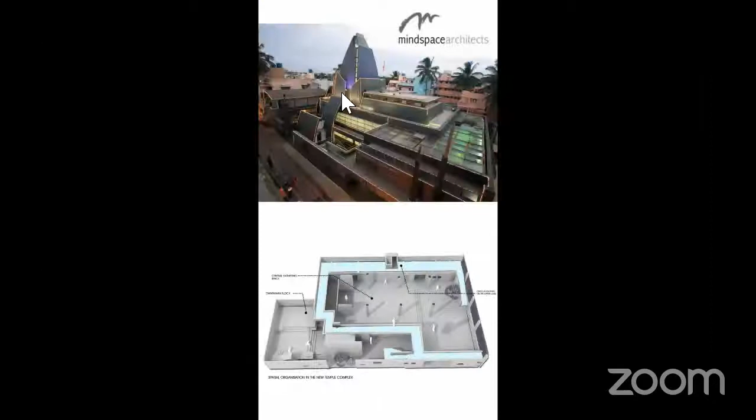A very good evening to all the participants, architects, students, and academicians who have joined us today. Future of Architecture 2021 is a first of its kind webinar interview series that is organized. It started when the pandemic started in 2020 with three architects from Chennai speaking about the future of architecture. And this year we decided that every week we will interview an architect. And today we have come to the 12th episode, the final episode of Future of Architecture 2021.

And we are happy to have with us architect Sanjay Mohe, sir. The event is hosted by RVS Chennai Padmavathy School of Architecture in association with Sushant School of Art and Architecture and also Manipal University, Jaipur.

A small brief about the host college, RVS Chennai Padmavathy School of Architecture. I can very proudly say that RVS Chennai also calls itself the Alternative School of Architecture, TASA, because we believe that we have to change the way that we have been conducting education, and an alternative methodology is extremely important. Our ideology towards the Alternative School of Architecture is always inspired and strives to foster diversity and create new ideas, allowing students to have maximum exposure and opportunities in our academic system.

We believe our academics is focused on five strong pillars which we have established. The first pillar being the School of Change. School of Change is the pillar where every academic activity is altered and changed in order to be practice friendly and make students more innovative, periodically able to ideate and develop new ideas.

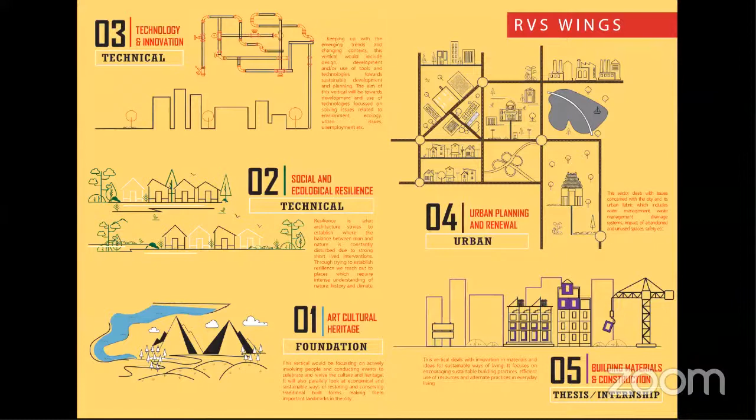We've also been able to work with eco cottages at Tiruvannamalai. This live project gives students an understanding of the difference between the drawing table and the site. Students go to the site and work with architects in actually building it - they have to bend the bars, take the bricks, load the cement. This process shapes their minds at a young age into the architecture career and gives them an understanding of the respect they should show laborers and the hard work that goes into any building that is created.

The third pillar is the vertical studio, focused towards the multiple MOUs and institutional collaborations that RVS Chennai has. It is a student exchange program within the country conducted with many colleges like Sushant School at Delhi, Manipal University Jaipur, Azadi College in Kochi, and many more, basically to solve, design, and create new projects which are design solutions for the environment. These are short term, around a week to two week long vertical studio design programs conducted with a student exchange program with various institutions across the country.

The fourth pillar is called SWS, Summer Winter School, which is an architectural platform where students are able to follow their heart and passion. They get to delve into other fields of design like fashion or product, and as well be able to follow their passion in architecture like sustainable architecture or conservation, and choose their careers in a better way. So summer winter schools are planned for them to identify themselves.

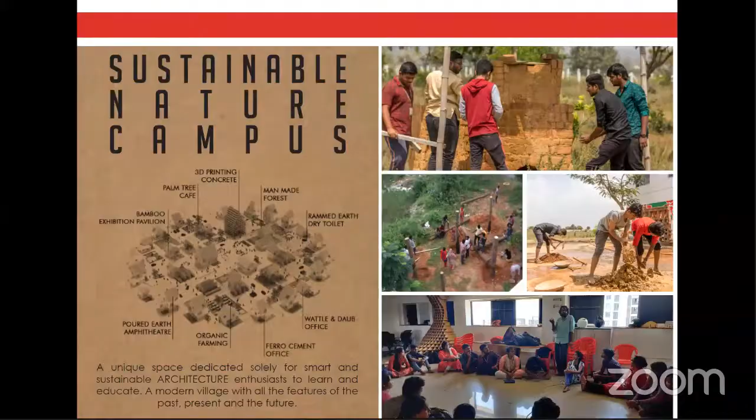The quarantine helped us create the Quarantine Gurukulam, taking old methodologies of learning into the system during the quarantine. This program was kickstarted as a night studio and in-stay program in our nature campus, where students and faculty stayed together during the quarantine, exploring multiple ways to learn from each other and ideate. All the details are available on our website.

The last venture we've kickstarted this year is an exclusive space called the Center for Design and Innovation, where we are trying to create a triangle of architectural institutions, architectural firms, and architectural industries coming together. This space has been created for architects to exhibit work, discuss, conduct workshops, and ideate in the city of Chennai. It's a 15,000 square foot space dedicated purely to developing, ideating and innovating. That's a small brief about RVS Chennai.